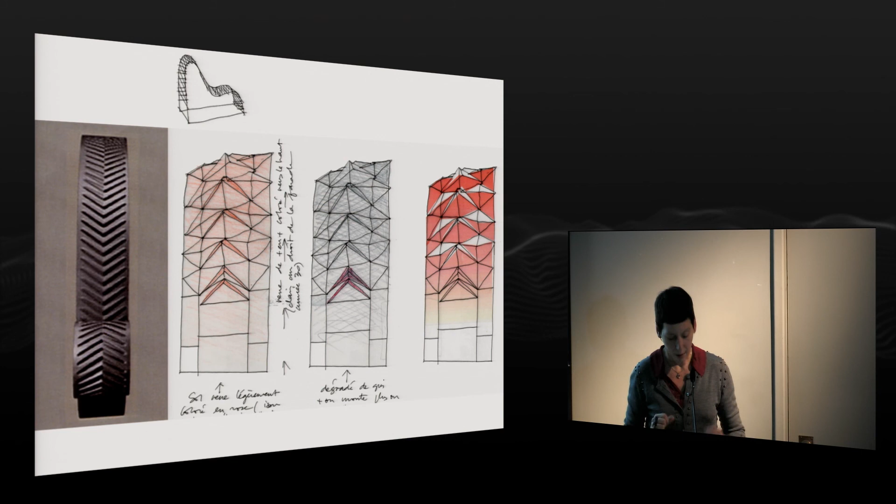The idea is to create a volume which can express all the infinity of spirits of the brand, which can really tell about the logo of the brand. So the idea is to fold a sort of envelope, like a folded glass which tells only about the logo of this car brand. You can see the envelope here, it's really like a showcase, only transparent. Even if the building is high, something like 28 to 30 meters, I wanted it to be only transparent, really a huge vitrine.

In it you will see the second idea, which is that the container expresses the brand, and the content expresses the car. Because the site is very small, only about 300 square meters, I was not allowed to build a lot of square meters in it, so I wanted to create a lot of breathing spaces. There are only something like 1,000 square meters at the end, but it's divided into a huge volume.

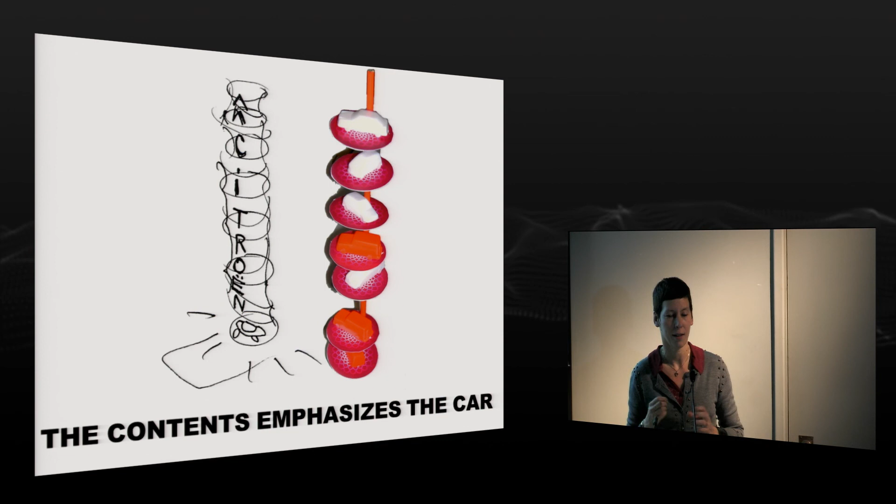In the center of this volume is a sort of sculpture, which you can see here. It's a sort of tree of cars, really in the middle of the building. It doesn't allow a lot of place for the public, who has to go around this huge sculpture of cars. But I wanted really to emphasize the cars and make it so the public goes around. He doesn't have too much space, but he's only looking at the cars everywhere, concentrated on this central sculpture.

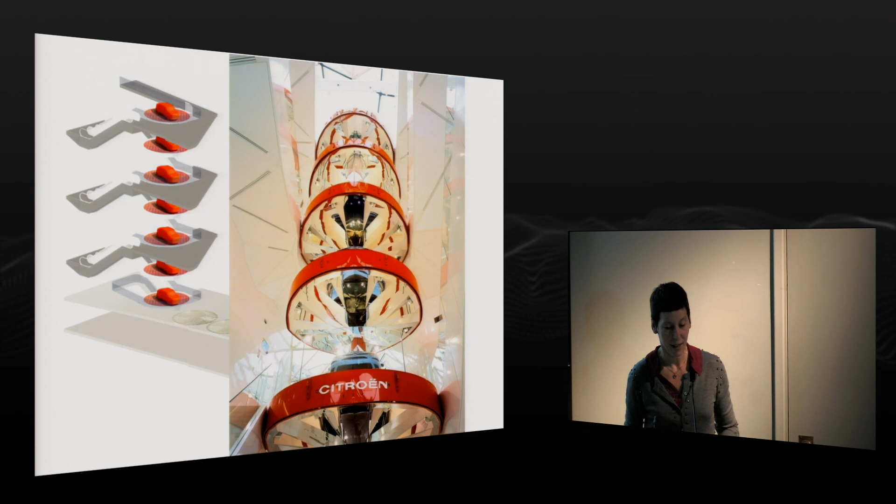Because the building is very vertical, the idea was to create this sculpture with 8 circular platforms. When you go up, instead of having only poor ceilings, the idea was to create mirrored ceilings to double the cars, so when you go up you see the reflection of the car, and when you go down you see the cars themselves. Around those two ideas, the project is very simple. It was very complex to build, but you have only those two ideas.

The container expresses the brand, and the content expresses the cars. You have a huge mast which is red. Everything around this tree of cars is red because it's the color of the brand, so you just have the mirrors and the sculpture, which is red. The basement is full of red too. It's a multimedia place dedicated to movies and to multimedia, I mean games, so you can have video games around the cars.

We have made a lot of models in the office, and the idea was really to sculpt the model, not in the way to invent a project like a car. The reason was more because the price on the Champs-Élysées is so expensive, I wanted to build the most centimeters I can inside the urban regulations.

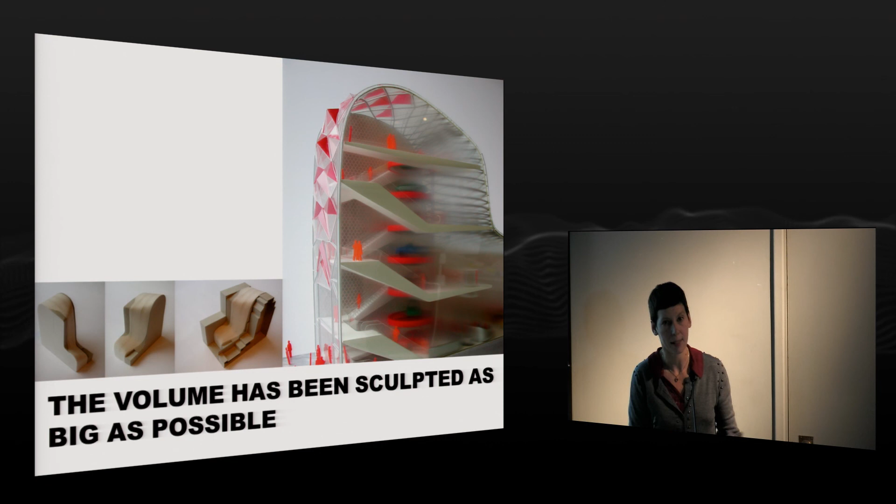We have tried really to be attached, to fit the best we can to the urban regulation, and it gives us this very curved volume, which is very high in the front on the Champs-Élysées and has a sort of smaller rear at the end of the site. On the right side, you can see a model that we made to see the way to dispatch all the passerelles, the stairs for the public around the sculpture of cars.

That was the first model that we made for the competition, and I think that even in the competition all my ideas were in this first model: the idea of a transparent curved volume, the idea of expressing the brand through the logo. The logo is a sort of shape like that, and all the facade is made with folds of glass which express this shape of the logo. There are red filters in the glass to express a little bit more the idea of the brand, which is white and red.

Here you can see the rear of the main facade. From the outside, we were not allowed to express the red filters in too bright a way, so in front of the red filters we put translucent filters to get a very pale red, a sort of very pale pink. But from the inside you can really see the red, and it's very warm because it creates a lot of reflections inside the building.

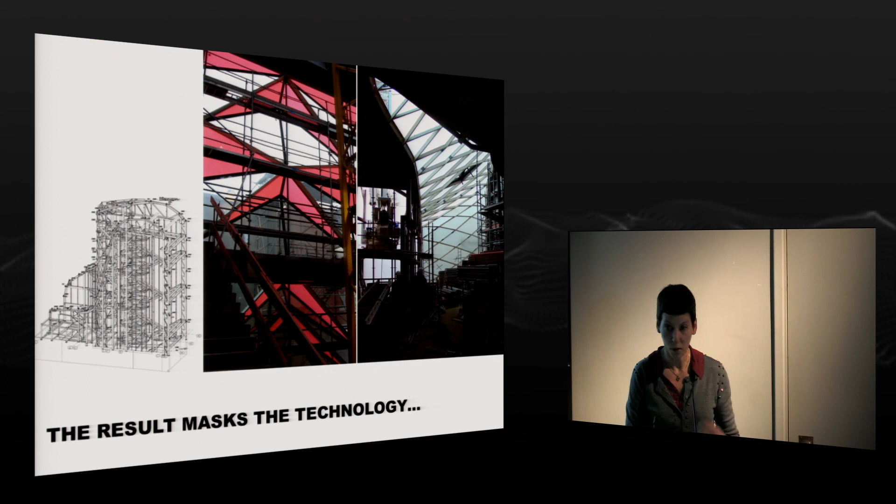So the idea for us was to create a very technological building, but after that to mask everything in a very pearly white atmosphere. The phase under construction is very dark, full of steel, but at the end you see nothing. You see just very bright white and red colors and very smooth details, and you don't see any steel anymore.

That is another building that we are trying to do in Montpellier, in the south of France. We try, because it's very difficult at the moment to obtain the permit.

I convinced the client, who is a French developer, to create a very mixed-use program, which was not the case during the competition. The competition asked us to create a building with hotel and restaurant, and we decided to mix those two programs with offices and also with housing. We were very happy to do a project which is really a deep mixed-use building.

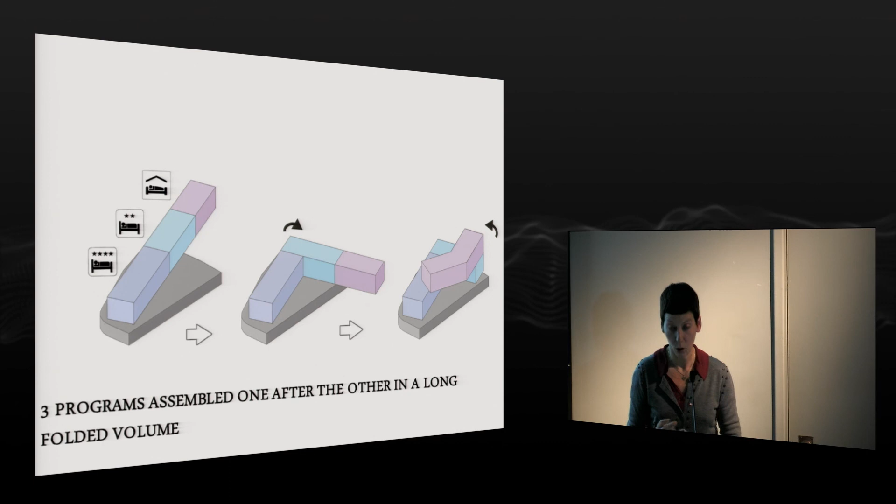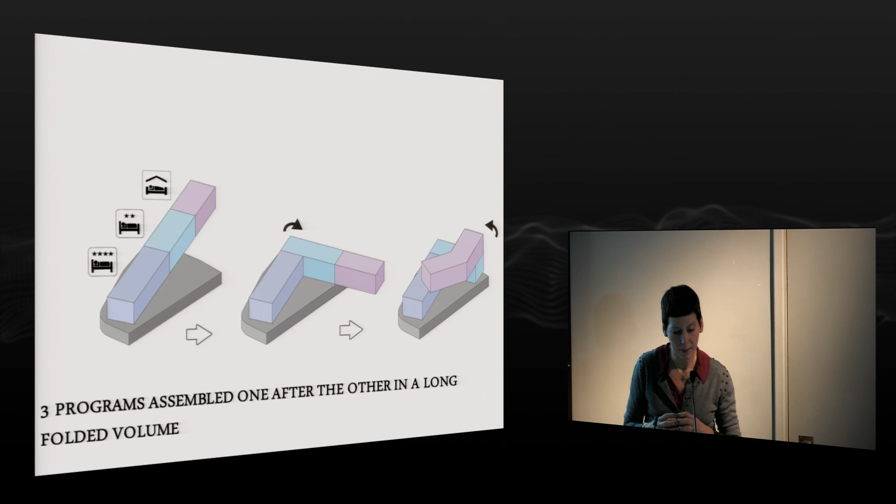We decided to create a sort of podium, here, with all the entrances of the different programs and with the offices. On this podium we decided to create a sort of unique volume which is very regular. The first part contains the first hotel, the second part contains the second hotel, because there are two, and the third part contains the housing, which was not anticipated by the town, but at the end they were very happy to see that this mixity was successful for the architecture.

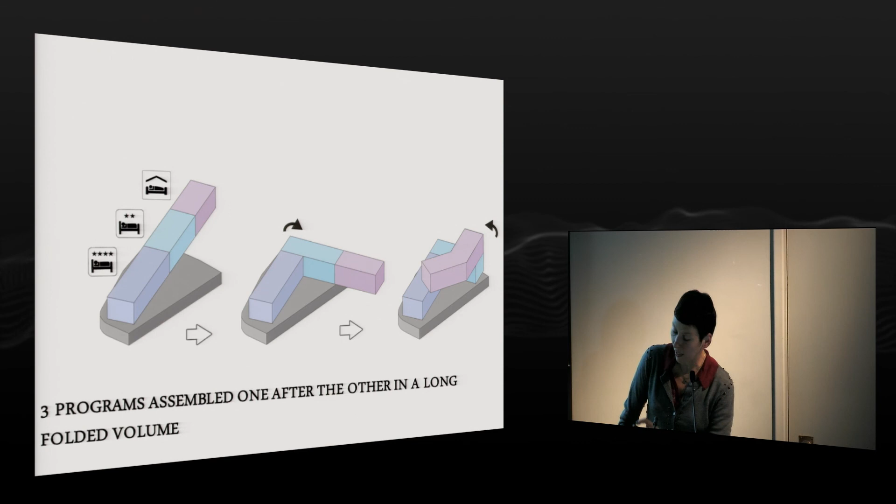We decided to fold this very long volume to respect the triangular shape of the site, and you will see it more in a good condition here. That is a model that we have made. You can see the railway station, which is here.

The first two volumes are very low, 6 levels, something like that, but they are perfectly integrated with the north part of the town, with the old city. And when the volumes move up, to create the volume dedicated to the housing, we have 5 levels more, and the idea is really with this one to anticipate the future district of the town. The idea was to create very beautiful housing.

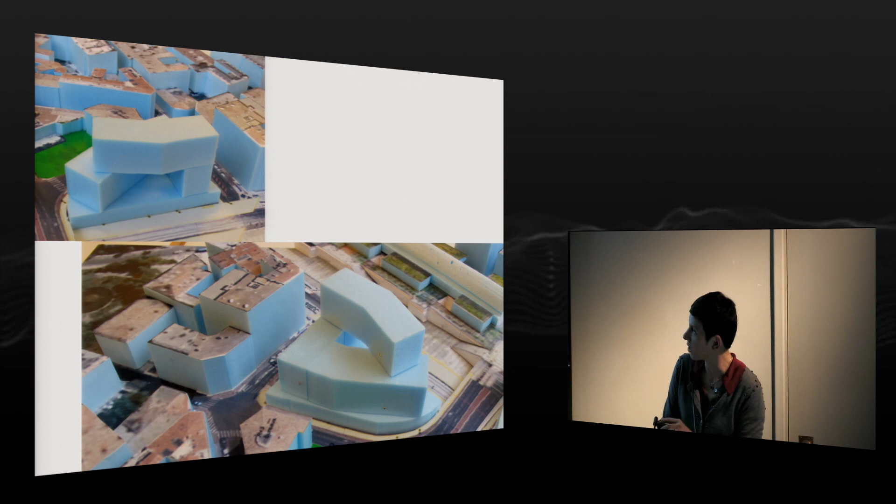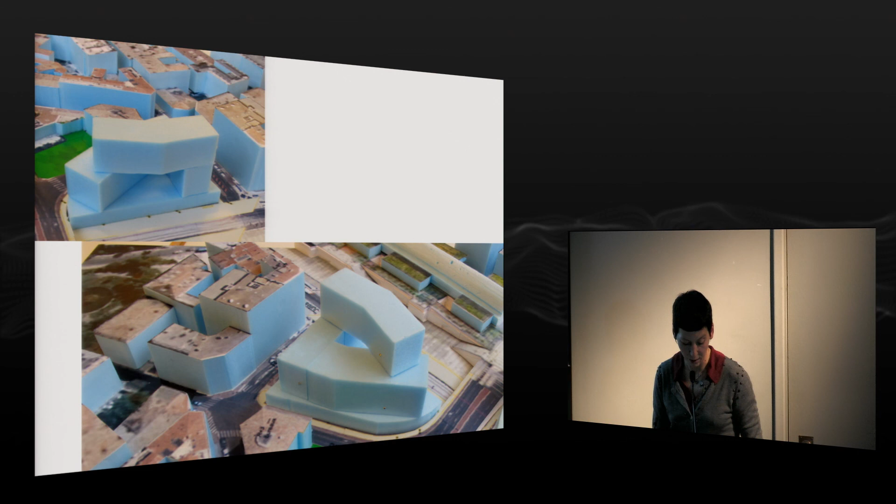In this part we have some big rooms for the hotel, which is going up, and this part is dedicated to the housing. It's like a bridge, so most of the apartments have 2 views, one of the north of the old city, one of the south on the new part of the city. That is the first 3D models that we have made.

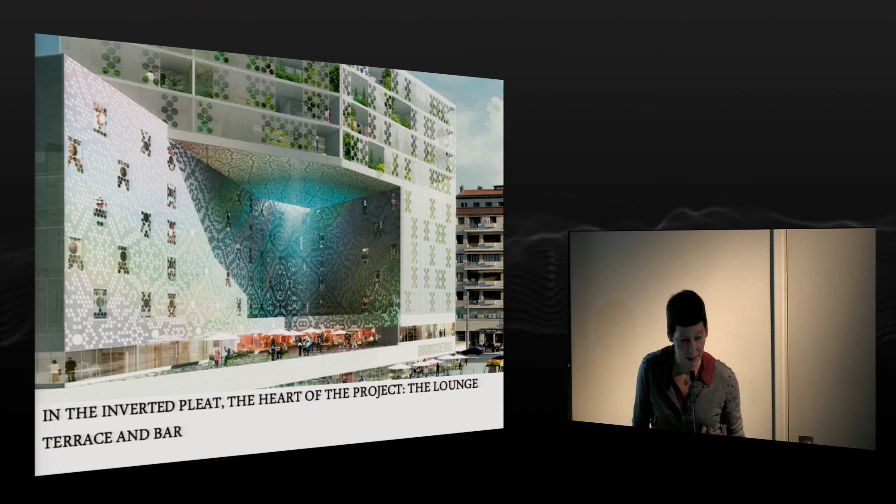That is some pictures. We decided to create an envelope which is really progressively more and more delicate, perforated. For the hotel, we are not so perforated, but when we go up to accompany the housing, the apartments which have a lot of balconies, we have more and more transparency. We have sliding panels. We are working a lot with natural ventilation because we are in the south of France and it's very hot during the summer.

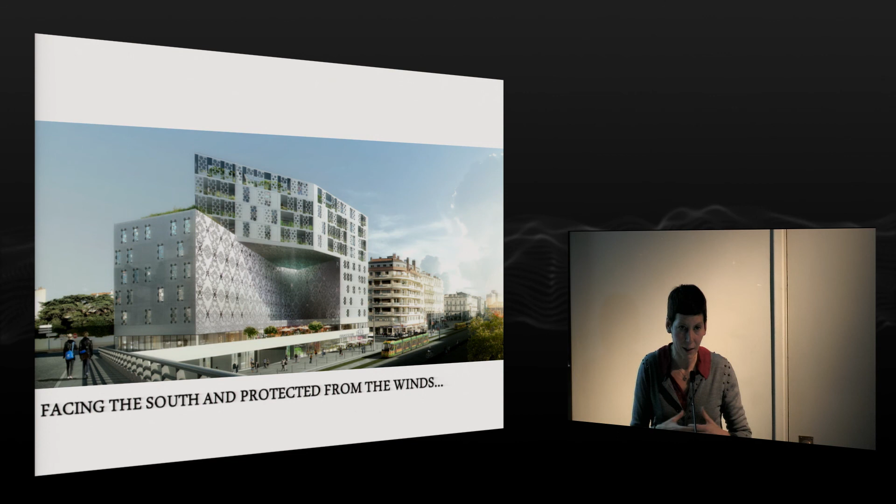One of the main points of the project was the idea to encourage a sort of common place for all the types of programs. It's this volume which is creating a sort of monumental media lounge. In fact, it's a sort of bar, mainly for the hotel, but also a bar, a cafe, a media lounge open for everybody outside and also for the housings, connecting the meeting rooms on this floor for the offices. The idea is to give this building and all its inhabitants a common place that they can really enjoy.

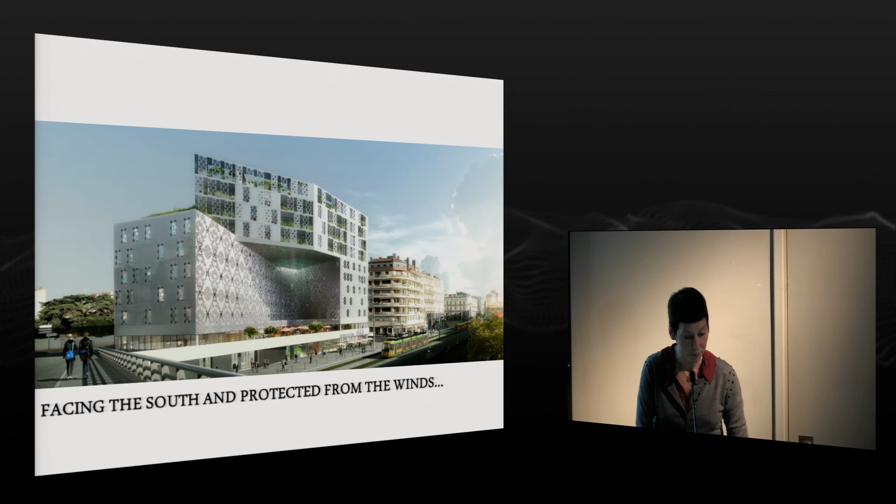This volume is facing the south. It's protected from the winds, and it's a sort of scenography, a sort of theater, looking on the south of the city. You can see some more pictures.

The facades are made with metallic panels which are perforated. The color is white. Only in this media lounge, which is this huge window on the town, we have the idea of putting a sort of holographic varnish to reinforce the reflections, to create some colors connected to the shadows and the sun. Also during the night, there are some very beautiful effects connected to this holographic varnish.

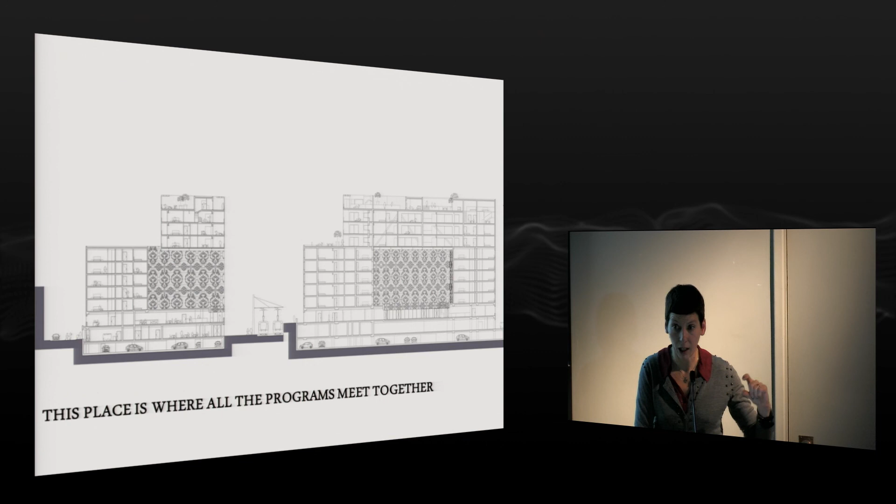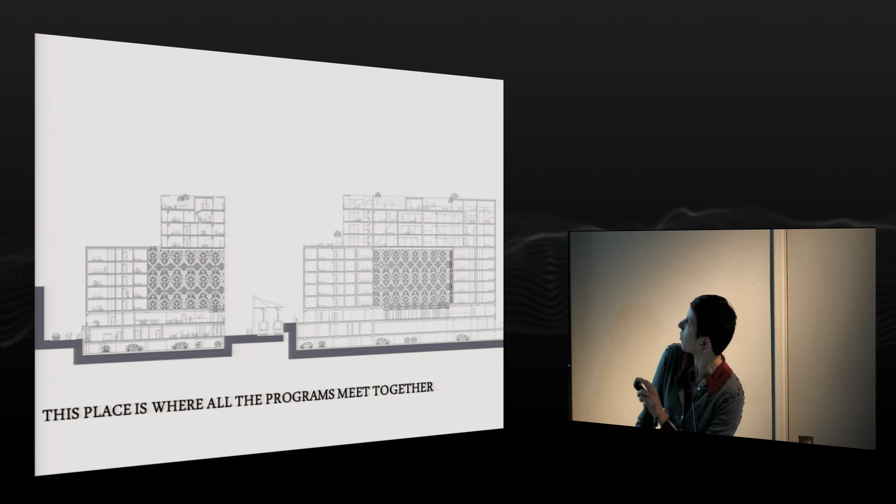That's the drawings for the hotel and for the housings, and some sections expressing the bridge. We have a huge Vierendeel beam, something like 28 meters, and it's not so difficult because the bridge is really connected to the two parts of the small volume.

That's the last project I'd like to explain to you connected to commercial activities. I have after that some other projects. That's a competition—we don't have a winner for the moment. The client is a very big French commercial developer whose name is Auchan.

The idea of the client is very difficult because he wants to create a huge place dedicated to commercial activities, cultural equipment, and leisure. It's something like 600,000 square meters. And he wants it very connected to the airport.

He wants to create a place full of different atmospheres connected to Europe—the idea is to tell a little bit more about Europe. For example, when people come from America or Asia, the idea is for them to go to this place to get the first feelings about Europe—the north, the south, the east of Europe, Britain, France, Spain—going through several universes connected to the different climates and cultures, and after that, of course, to visit directly London, Madrid, and so on.

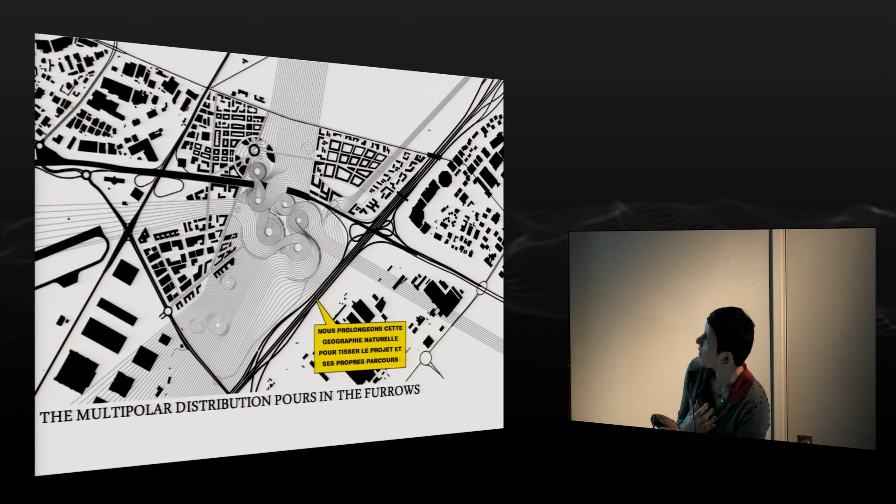So we accompany the public, because this part, it's still a park. So we accompany the public who will have the possibility to go up on the roof of the project. And it's like in a mountain. It will take promenades in a sort of park, and they will have the possibility to go down in the shopping mall, in the different places dedicated to commercial, leisure, and so on.

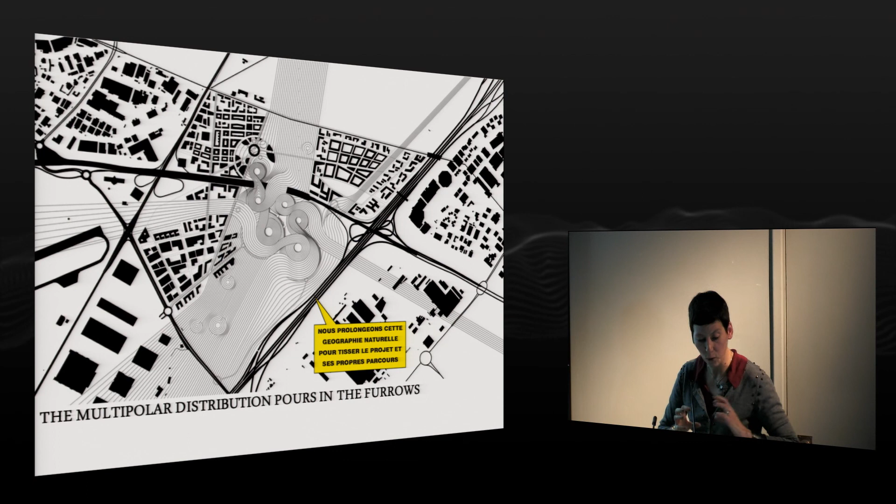But the integration of the project, it's very deep. I was really impressed by the context and the curls that we have made. It's really the idea of working with the furrows and to turn them into this project. You can see a little bit better. The green is the color really because that is a natural park, and that is the park which is on the roof of the project.

Here you can begin to see the work that we have made on the lines. It's like the furrows that we have reinterpreted into the project. And you have different colors of park. For example, that is lavenders because we are on the roof of the Mediterranean atmosphere. That is the North atmosphere, the France, the East Europa atmosphere, and the Britain atmosphere.

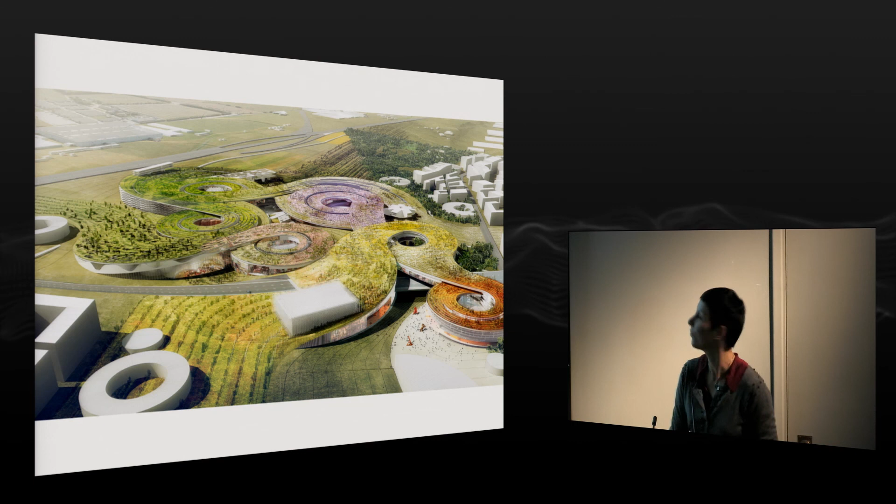So on each part of the roof, we are working with specific landscapes which really tell deeply about the geography, the climate, and the spirit of this part of Europa. That is a roof view. The site is beautiful because when you will be on the roof, you will have the possibility to see Paris. The Eiffel Tower is somewhere here.

And you have, no, it's not little, it's big programs which are emerging on the roof. It's the cultural equipment, because we wanted for them to be upon the project and underneath the project. We wanted for them really to create a sort of continuity between underneath the roof and upon the roof. That is the idea of the balcony with the Tour Eiffel that you can see here, and the different atmospheres that we would like to invent.

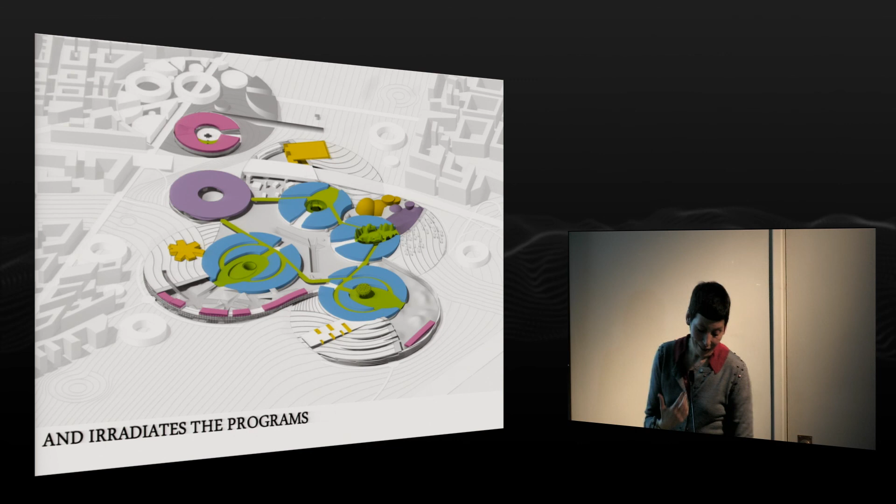That is the flows which are underneath the roof, which have the possibility to connect each universe of the Europa. You have squares which are in a small scale to speak about the urban European scale. You have a lot of 3D sketches and programmatic sketches to express the way to organize the program.

And the way that we have emphasized all the cultural equipments. They are like little points, but the idea for them was to create a sort of disobedience. I mean, they interrupt the flow of the leisure or of the commercial activities to create contrast and to make it so that everybody can enter into them without knowing before. We want to make it so that the public has the possibility to go easily inside, between two shops, for example. That is some other pictures.

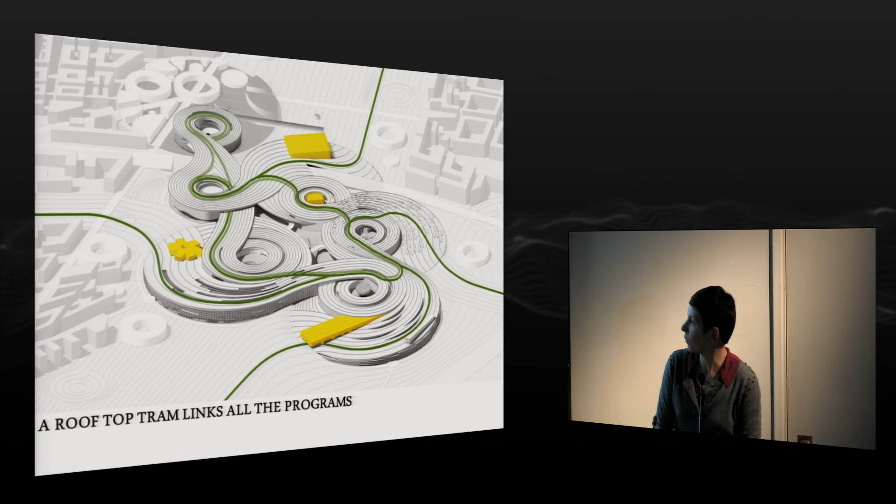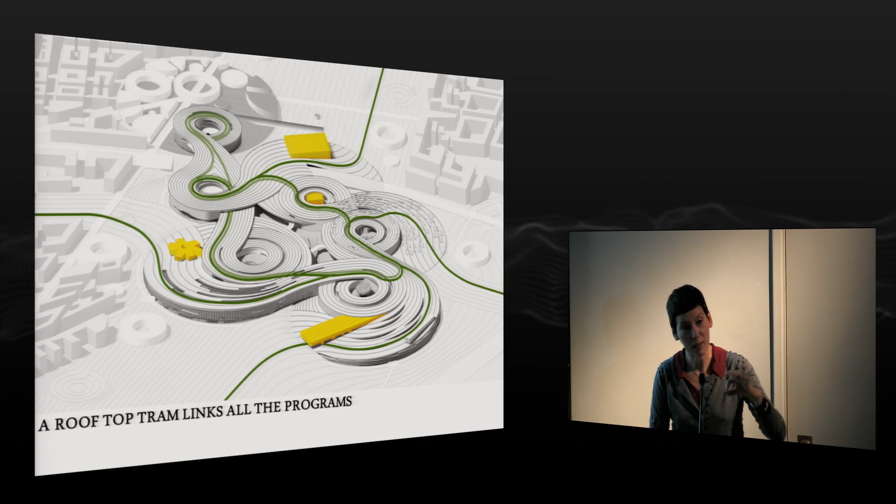The way for the cultural equipment to go through the roof and to also create a lot of entrances on the top of the park. And the green line is a sort of train that we wanted to link. So it's a sort of rooftop tram, like in the mountain where you have a sort of promenade that you can take on the top of the mountain. It's the same idea.

Around the sustainability, because the project is so huge, we wanted to create external projects to help our project, but also to help the district. And the idea was to create a sort of project which is like a sort of open source project. And it can become also the logo, the brand of the project.

About the cultural equipments, you can see the first one that I have built a few years ago. It's the refurbishment and the extended part of the Lille Modern Art Museum in the north of France. You have an existing building which is black and the extended part which is red colored. The existing building was built by Roland Simounet and was listed around 2000, something like that. So it's one of his last constructions, and it was quite immediately listed.

So during the competition, we really had to work with the monumental authorities, and the idea for them was to create an extended part which was really separated. We had to keep a distance between the old building and the new one. Perhaps for you it's very difficult to understand that, but in France, when we have a listed building, it's very difficult to allow contemporary architecture. The monumental authorities are always afraid of contemporary architecture.

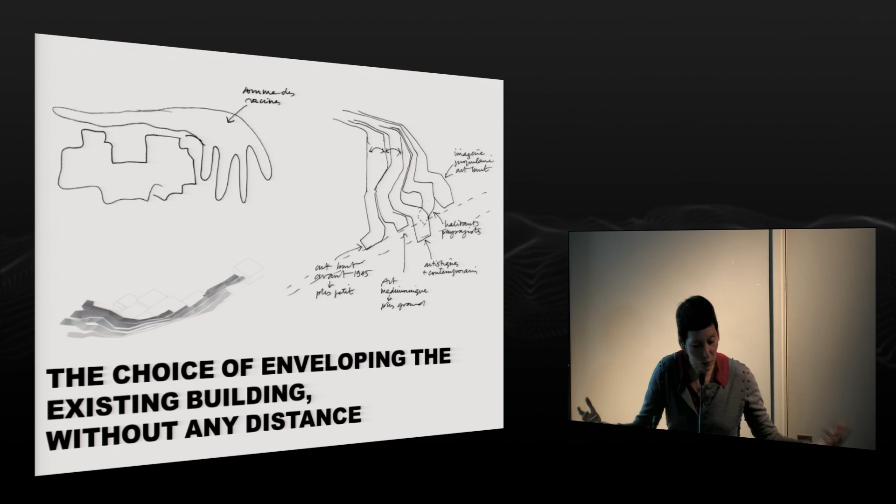It was also a way to respect the park, which is beautiful, surrounding the existing building. So the less I take place, the more I respect the park, and I let a lot of breathing spaces around the global museum, and I let also a big place for the park to develop itself. I have organized the extended part like two arms, which are telling Roland Simounet that I love the existing building, and I wanted to be very close to this existing architecture.

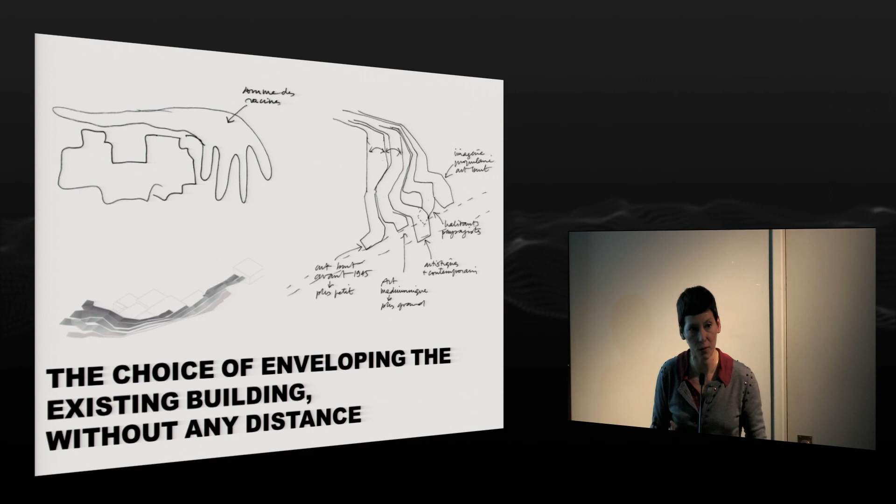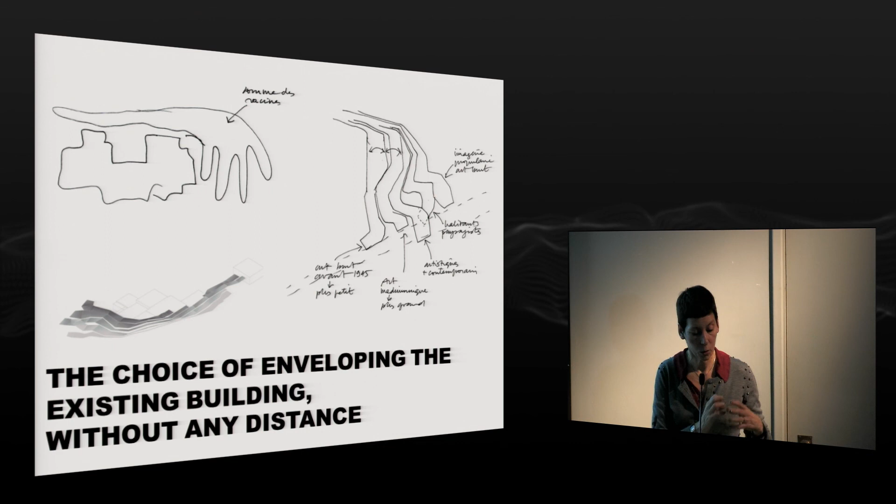I wanted also to create a lot of links between the administration, for the collections, for the flows. With this idea, I have created a sort of technical flow which is parallel to the public flow. So in terms of functionalities, it was much more efficient to do that. But also in terms of architecture, I insist on that. It was very important to link the old building with the new one, to link the old collections with the outsider art collection. And at the end, I won the competition.

That is a model that I have made to express the fact that even if I like the existing architecture, I wanted to be independent and to have my own vocabulary to envelop the outsider art. I didn't want to do the same architecture as Roland Simounet. This is a drawing that I like because it expresses the fact that on the extended part I have made something which is quite different in terms of volumetry. The rooms are not rectangular, they are very long and folded, but the scale is the same.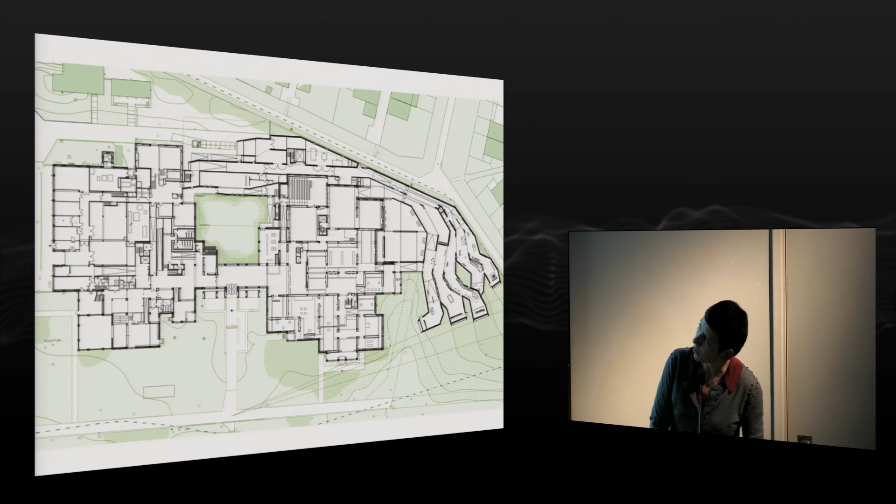I've always tried to have my own vocabulary, to have my own feeling connected to the outsider art, but at the same time I wanted to keep the same scale and to respect with the scale the architecture of Roland Simounet. It's a very flat project like his architecture. He has made his architecture like a sort of villa, and I have made the same. It's a sort of villa, but in a more organic way to arrange, to accompany, to envelop the collection.

So now the result is that I had the possibility to create a sort of continuous promenade, for example, between Dubuffet and Annette Messager, who is a very great artist of contemporary art. When people are moving in the museum, they are quite not noticing when they are passing through contemporary art and arriving into outsider art. That is the way to organize the five very long volumes. The phase under construction.

It's a building that I have made with concrete, but the roofs are very light. It's a steel structure. At the end, you cannot notice it because it's really like five fingers, five roots, which are emerging from the landscape.

And because the outsider art is very fragile, we had to create places and rooms which are quite a little bit dark, because the light is very dangerous for the art. So you just have little perforations, and it was a sort of way also to create a link with the architecture of Roland Simounet, because he has worked a lot in North Africa. And my way to create the perforations was inspired by the moucharabieh, which are very often in North Africa. So I wanted to tell Roland Simounet that I had, in a way, the same roots, the same inspirations.

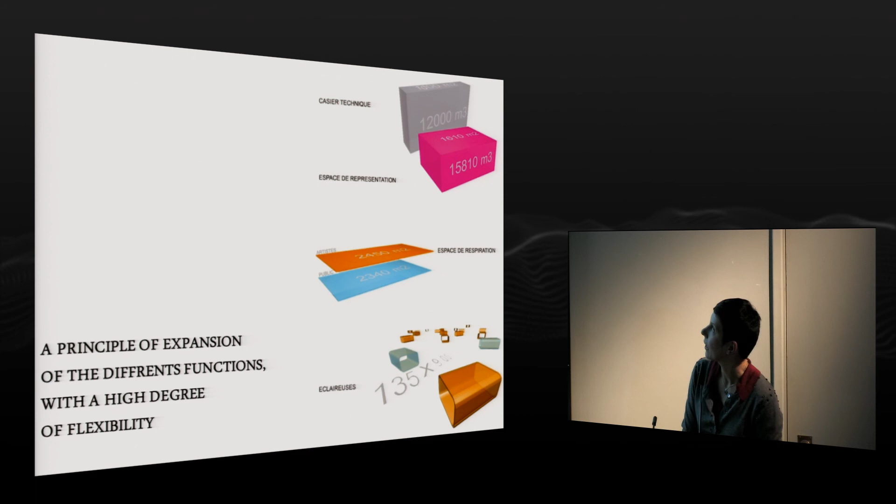That was the challenge. We wanted really to create a sort of mix between the visual arts and the music, and to create also a mixity between the public and the artists. So it's a sort of melting pot between artists, public, visual arts, and music. And I will go through in a quick way, because it's very difficult to explain in detail; I need a long time. But I wanted to create 2 types of places in the building. Places which really have to be formal, which have to be acoustically waterproof, which have to be insulated. We have 3 places like that, 2 concert halls and a sort of cinema.

And everything else, the rest of the building, I wanted it to be very flexible. And I've called all the other places breathing spaces. They are very flexible; they always have the same type of ceiling, same type of floor, and the idea was for them to change the program. So, for example, for 6 weeks, all the breathing spaces can be dedicated to artists because they have to prepare an exhibition. After that, it can be a resource center, it can be an exhibition place, it can be an extended part of the cafe. So the idea was to create around the 3 main concert places square meters which are totally flexible.

You can see the phase under construction and how much we were completely étouffés. Yes. In this Parisian site, with no possibility to have windows and no possibility to have ventilation. I mean, it's a very, very dark place.

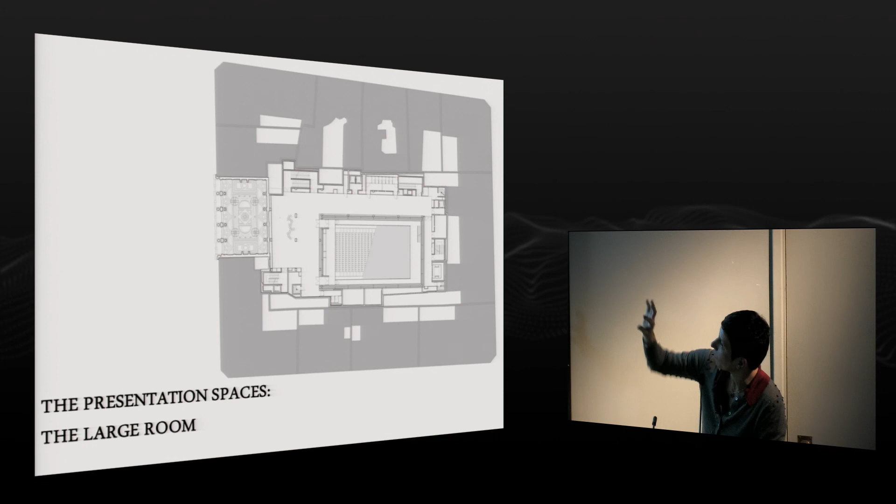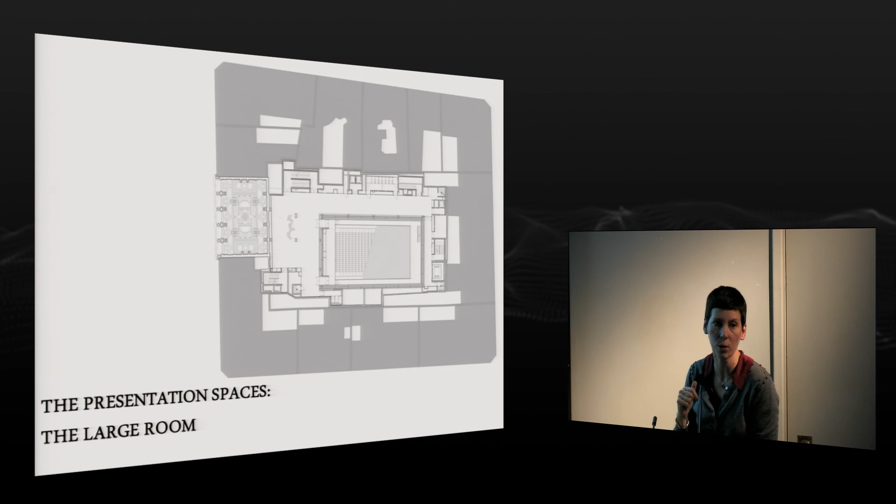That is a sort of main plan. You can see the main concert hall, which is here. And the acoustic idea of the project is like Russian dolls. So you have 4 or 5 very insulated envelopes, which are going smaller and smaller until this place, which is the main concert hall.

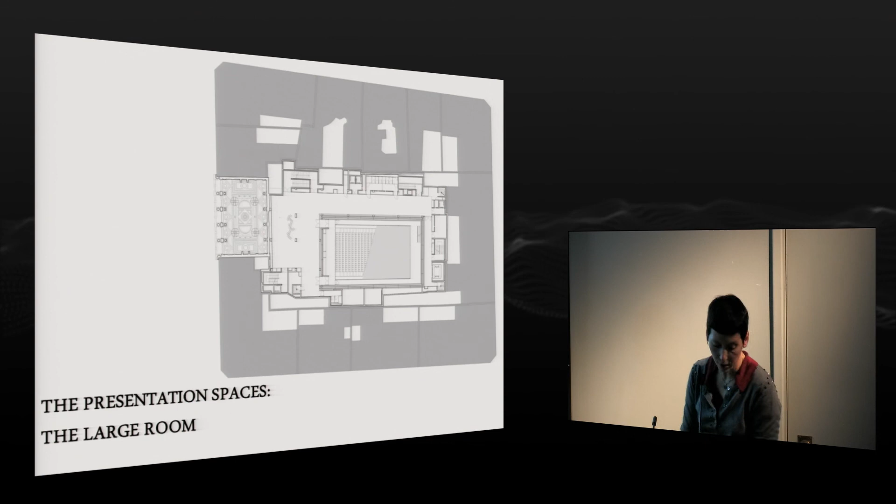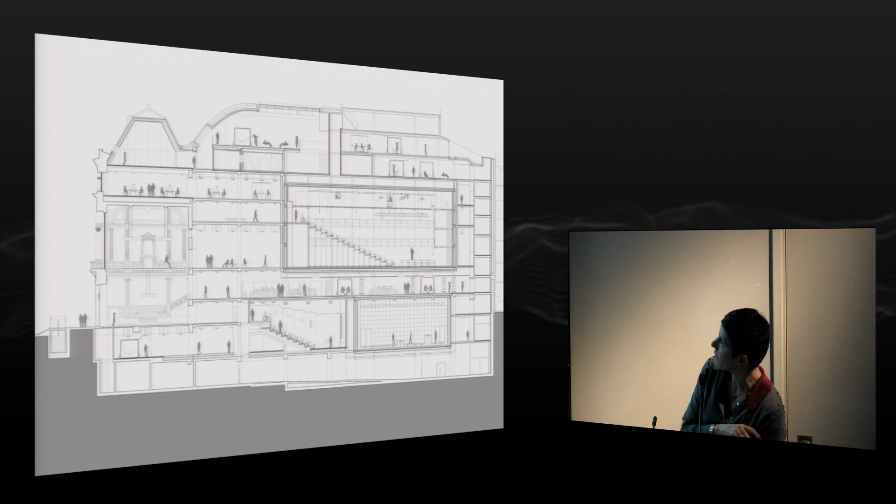That is a section. You can see the 3 main places, the first concert hall, the second one, and the little cinema. And everything else is very flat levels, like breathing spaces, which are totally flexible. That is a phase under construction for the concert halls. We have a lot of flexibility inside. The floors are moving up and down, the ceiling too, and the walls are also very flexible with a lot of mobile panels and so on.

That is the main concert hall. You have the possibility to have a stage which is here, but you can have many stages in the middle. You can have a stage on the opposite side of the concert hall. So the flexibility is also in this main place. You have also seats which are mobile. So on the left, you don't have any seat. It's like a wall, and you can stand up. And on the right, you have something like 380 seats to see concerts which are more calm.

That is a small theater, the small concert place, with the floor which is moving up and down, and you have different scenography. It's a place where the sound is very, very deep. So when you experience this place, it's really full of impressions. That is the sort of cinema.

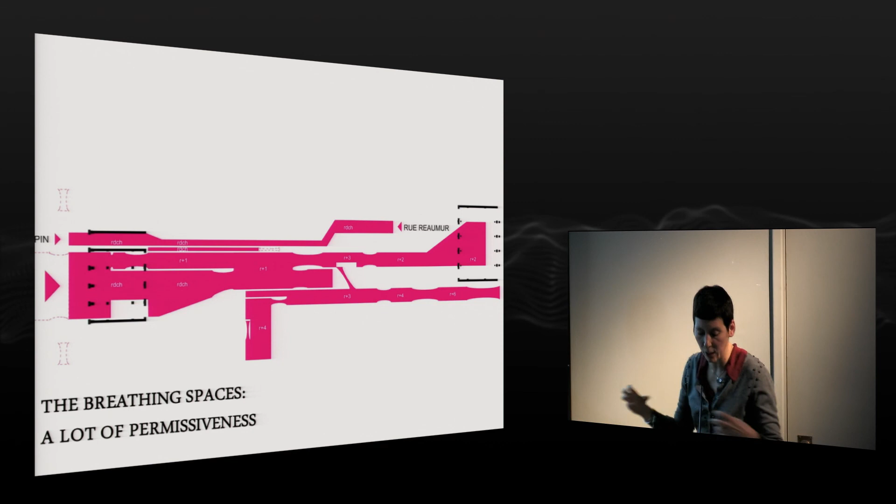And that is the development of the breathing spaces, which are folded in the building from the basement to the top. That is one of them, which is surrounding the main concert hall, and they are always doing installations. That's dancers from an English art team, which is called We Could Never Be a Dancer. That is an art installation, also made by English artists. That is in the basement, close to the little concert hall.

That is another breathing space, which is here colored in yellow, because it's also a work made by an artist. And that is a furniture that we have made, which is called éclaireuse. The idea for this furniture is to move. They are moving everywhere in the building. Some of them are shelving. Some of them are places to work. The shelves are here, the places to work are here.

When they are pink, it's dedicated to multimedia, so you can sit or be in several positions, and you can really be immersed in multimedia installations. And the idea was to really connect all the éclaireuses together and make it so that they can really move everywhere in the building to accompany the different programs when they themselves move. That is some of the éclaireuses, multimedia éclaireuses.

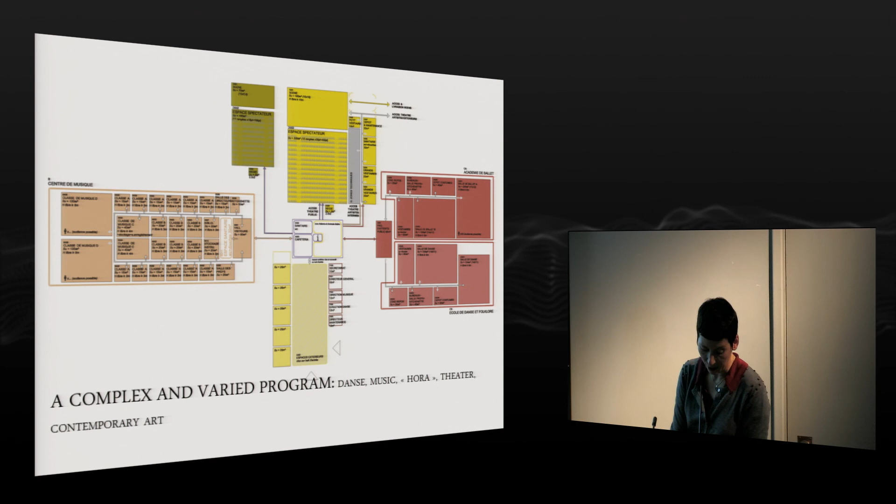The surroundings are, I mean, it's not like in France. So it's very heteroclite. You have very big buildings with 15 floors of housings. You have a very awful building which is here dedicated to sport. So the architecture is not so beautiful. The program is here, so the 4, now 5 parts dedicated to all those forms of arts.

And so the idea was to create this vertical building connected to the narrowness of the site, but also connected to something else, which is that in Israel, in the public equipment, you have to create shelter rooms to be protected from rockets. And you have to have those types of rooms in a very simple place on each level, so that people, if there is a fire or a rocket, have to be in less than 4 minutes in these shelter rooms.

So the idea was to create a sort of very strong central tower in the middle, which is not so big. It's something like 17 meters by 17 meters. And in this small tower, you have all the vertical circulations and all the shelter rooms. And at the end, this constraint was very helpful for the project, because we decided to create in this tower a sort of generous place where everybody meets, where there is also the possibility to create installations, to do exhibitions. It will be a very beautiful volume.

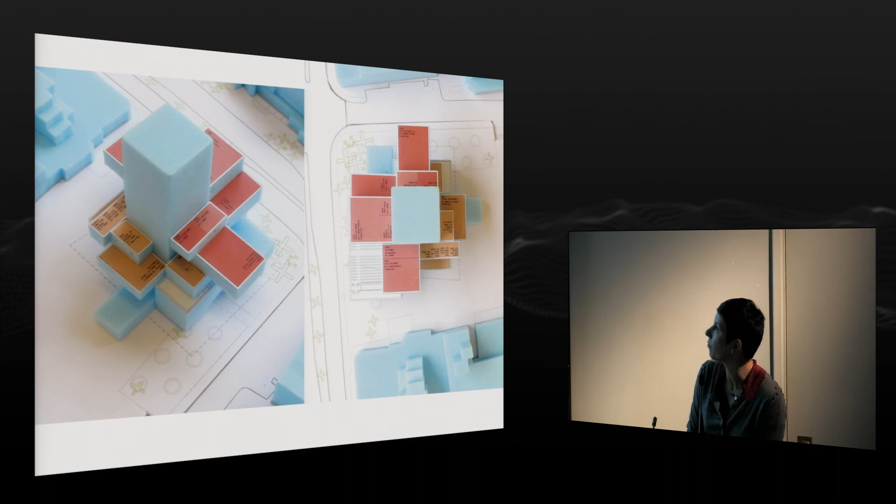But you can remark that almost each of them has a different height, different size, to respect in a perfect way all the constraints of the program. We have made several models one more time, and the idea was to benefit from those volumes to create a lot of outside terraces, so that the users can work inside, but they can also work outside. They can have the possibility to rest outside.

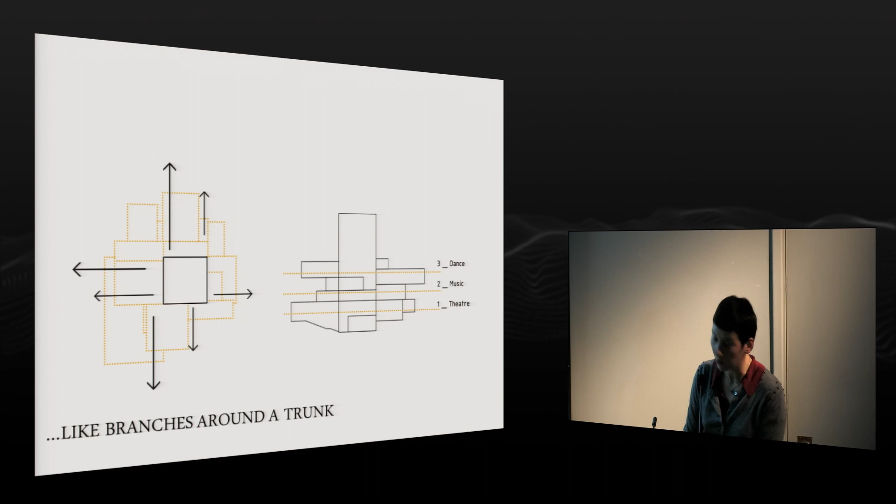The views are, of course, beautiful. You have a lot of sun. So it's very helpful also to have more square meters to work outside on the terraces, which are protected from too much sun. That is one of the models. We also had the idea of enveloping the building with a sort of skin made with metallic panels. You will see that after.

So the idea of the shadows of a lot of terraces which are really open to the public and to the users. And of course, because the volumes are really surrounding the tower, you have terraces everywhere, and you can get very beautiful views on the town of Ashkelon, on each orientation, the north, the south, and so on.

Some of the terraces are full of shadows, which is a good idea because it's so hot in warm moments. That is an example of terraces where you can have seats, a sort of theater, and it's given to the users in a very generous way to help them have more place to work and experiment.

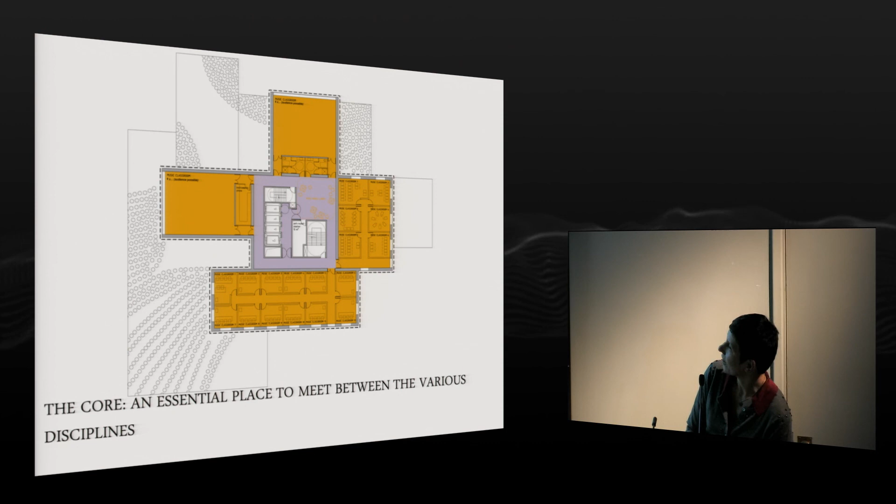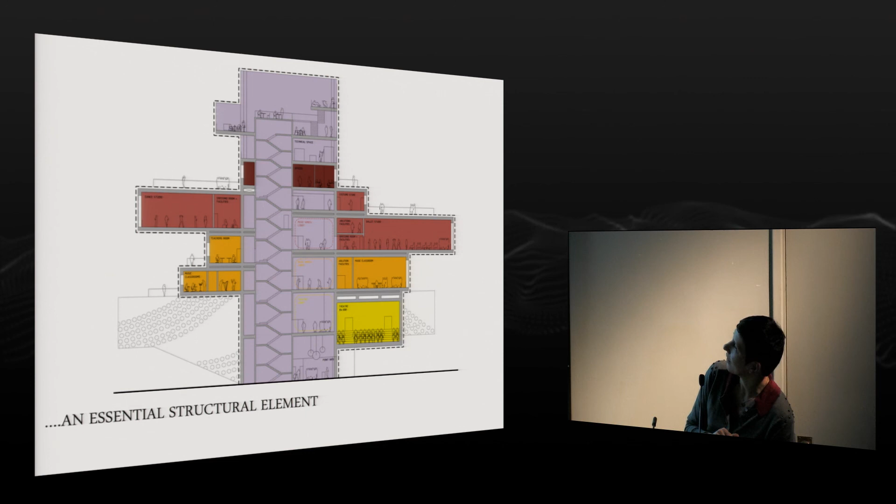That is one of the floors, the terraces which are open to them always. That is a section, so you can see how many levels there are, and the way to put life in this tower. That is a model we have made. The circulation is always different from each level to another, so people can see together, and they can use this place to create video installations, movings. Really to have this place like an art place.

And of course you have stairs which are protected, but you have also stairs in the middle of the atrium.

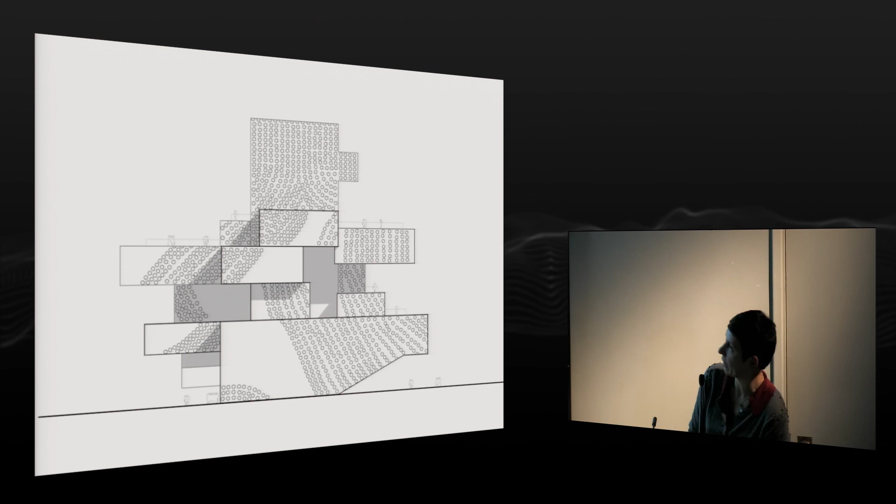That is the idea of the metallic panels, which are creating a sort of continuity. You have a lot of perforation because you have a lot of windows behind.

I will just show one project. That is the building I have made in Saint-Étienne. You spoke about it a few minutes ago. It's an administrative building which is also close to the railway station. The idea for this building is also to begin a new district, where the mayor of Saint-Étienne wants to demolish a lot of buildings and create new contemporary architecture, mainly offices.

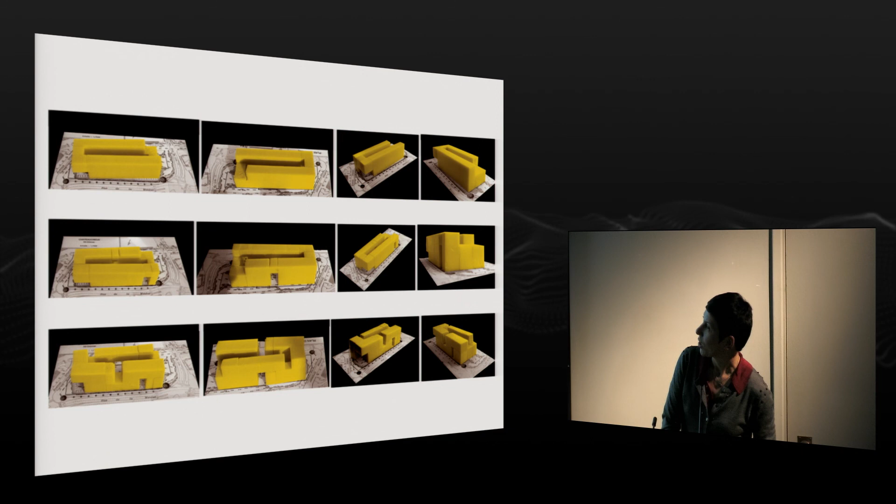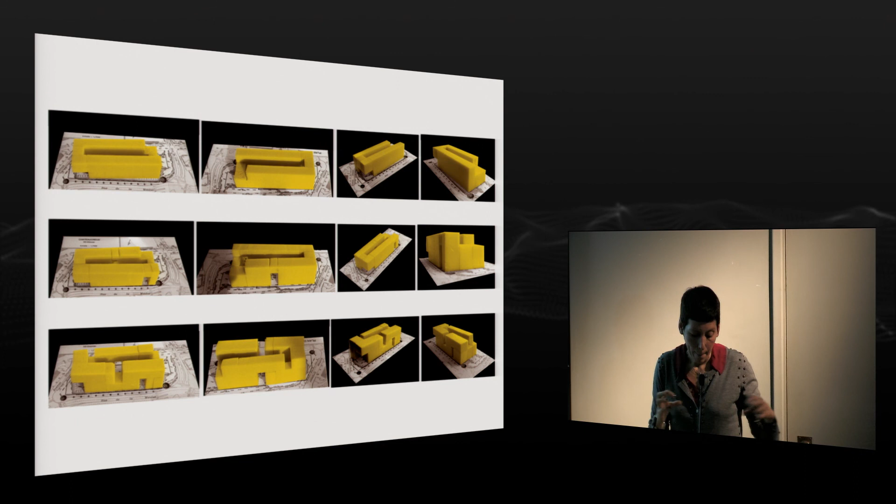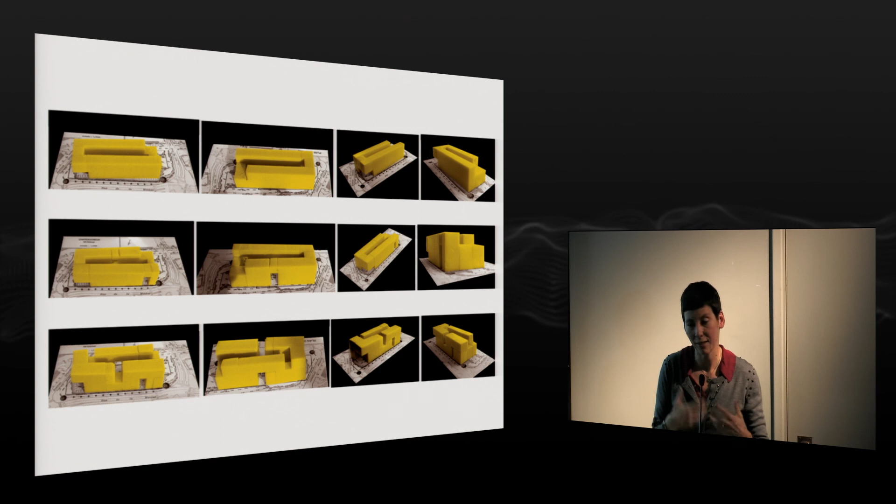So we tested a lot of models, but you can see each time, particularly at the end, the way we have, once more, created a sort of regular volume, and folded it for two reasons. The first, to keep the continuity of the volumetry, to allow the users to fix their desired square meters, not during the competition, but after. And we had to absolutely keep a lot of flexibility, so we had to keep the idea of a continuous volumetry.

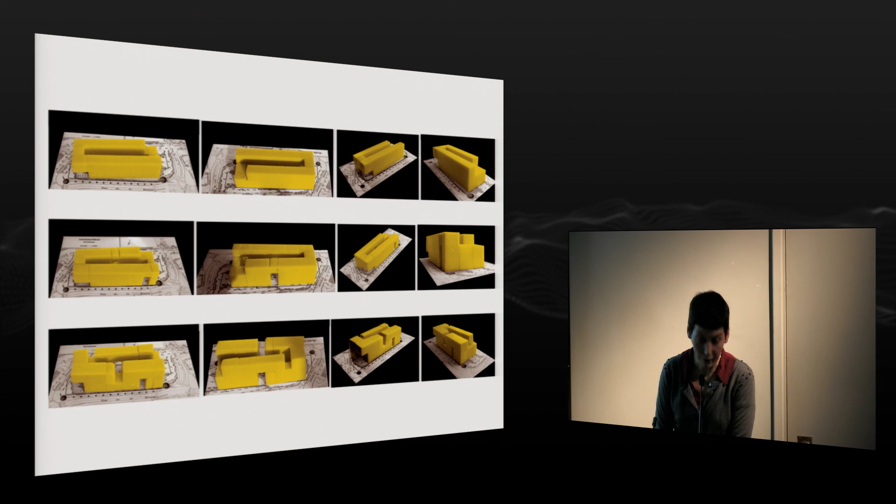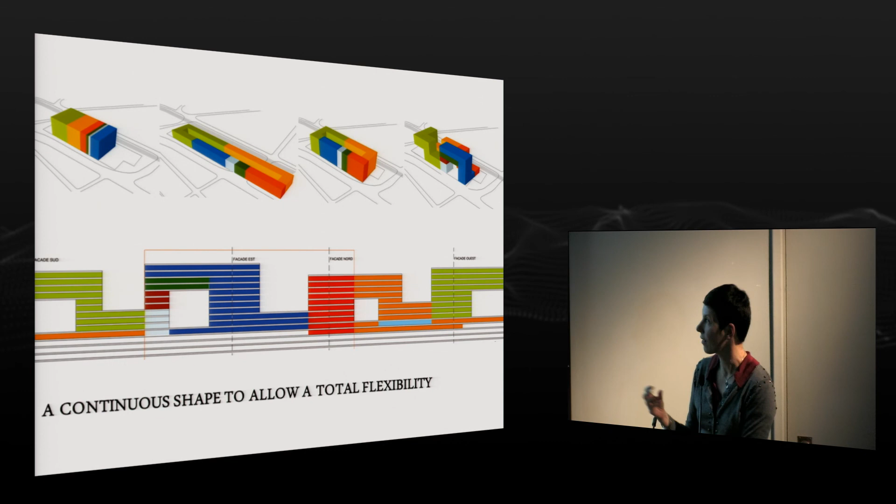And the second reason was to create a lot of doors, to create transparencies, which you will see in more detail. So the final volumetry was this one, and it allows people to increase or decrease their number of square meters. They only have to get the approval of the neighbor, but because it's administration, they are always okay to do that. So the building still keeps a lot of flexibility now.

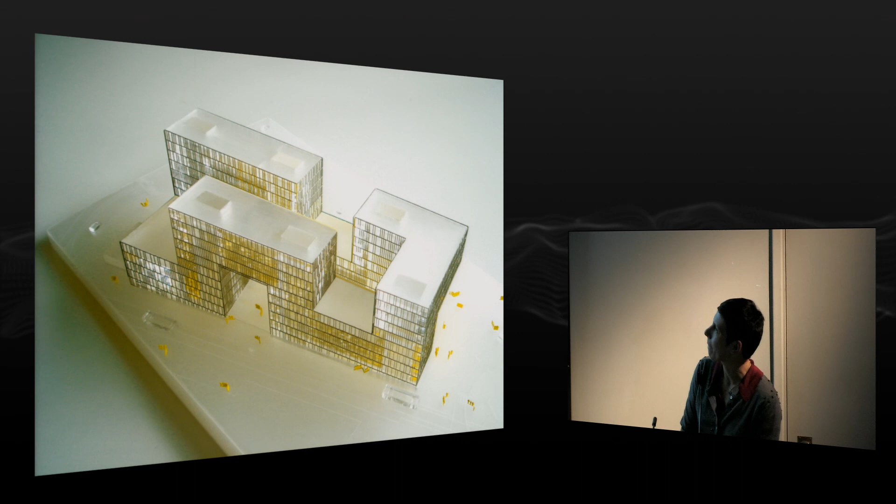That is a way to fold the building. You can do a model yourself. That is one of the first models.

In fact, you have two rows of building, two parallel volumes. When the first one is going up, the second one is going down, so you can have inside the offices a lot of views. You don't have so much space where you're really in front of another part of the building.

Here, when the first is going up, the second is going down, and the opposite is also here. You have three big doors: this one which is behind, and this one which is the main entrance to the courtyard, which is in the central part.

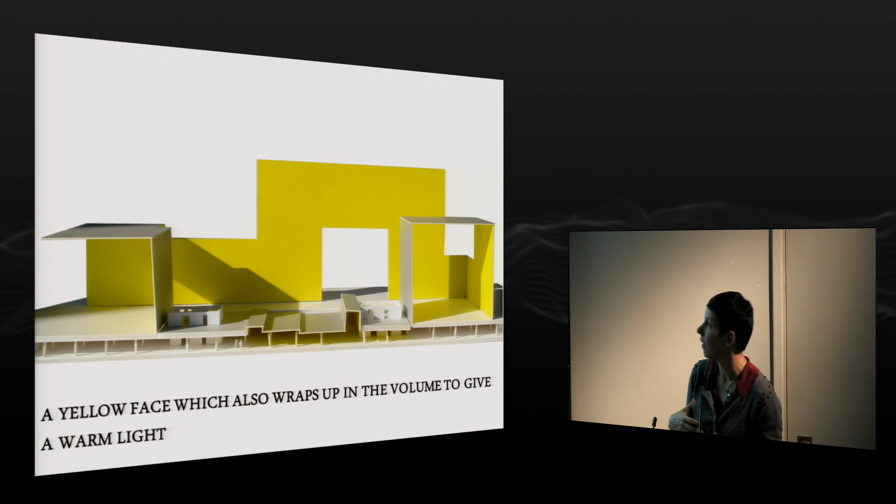The idea of folding the buildings is also inside the ground floor, inside some of the common facilities. That is the three doors. This facade is facing the south, and you have all the entrances connected to the courtyard, to the interior street.

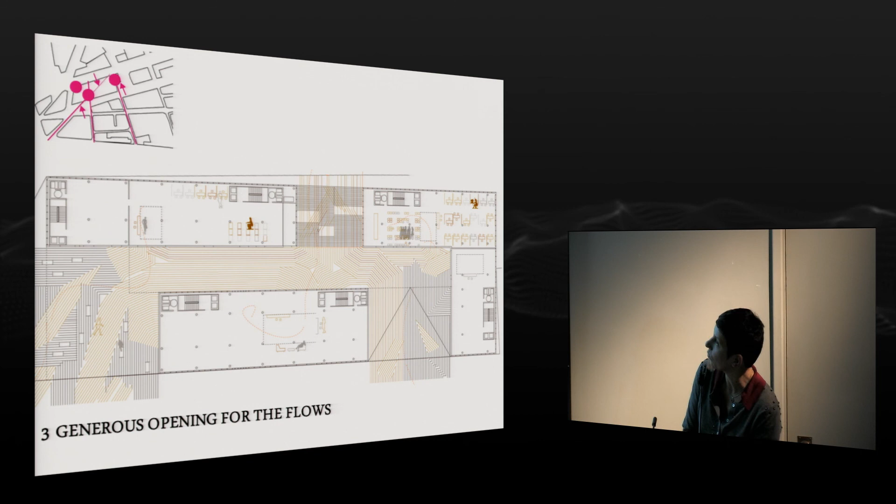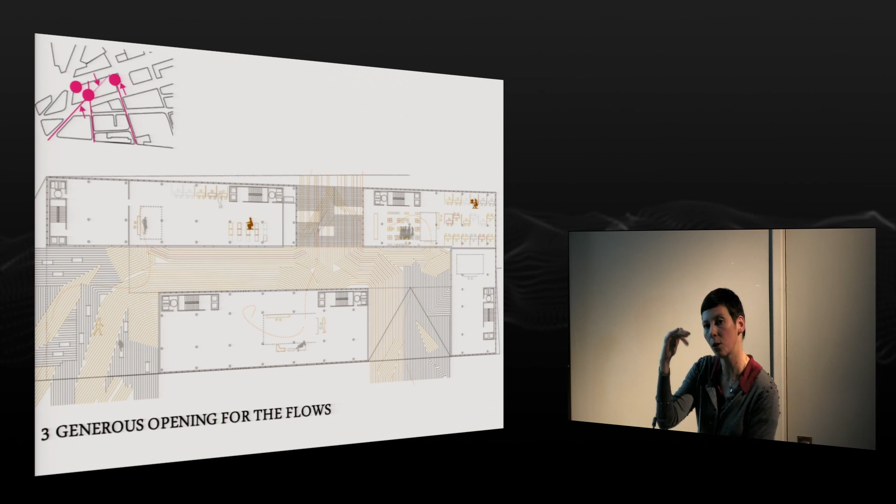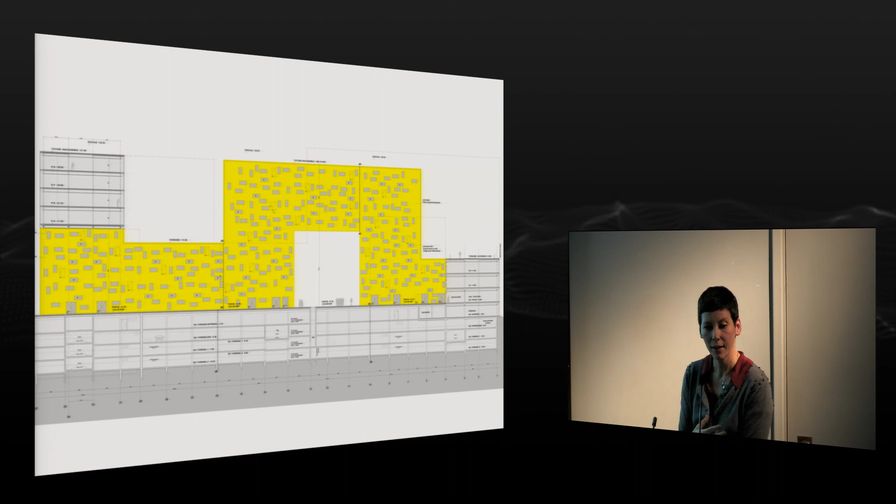There was an idea of using a very bright color. I have chosen yellow because the street you can see here is very narrow—only 8 meters—and the building goes up to 35 meters. So I wanted to create a sort of courtyard which is very playful, very bright, with a color like an artificial sun.

The idea of the yellow is to create a sort of front facade which is very playful. That is the volume, the building integrated into the context—you have very small buildings but also very high buildings, like this one. The main entrance, and the idea of the yellow, is to always stay behind the alignment, the outside alignment.

Once more, there were monumental authorities who don't want too bright colors on the outside facade. So my idea, like a joke, was to create the yellow only on the interior facades. He was not so happy.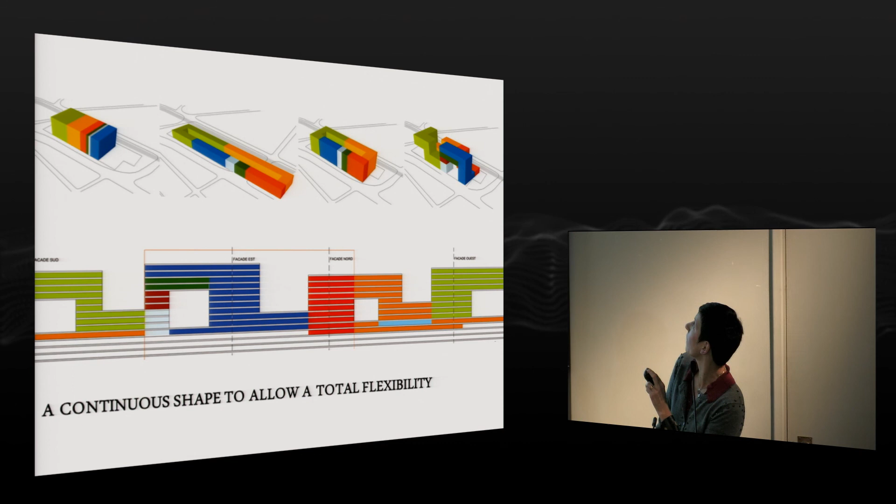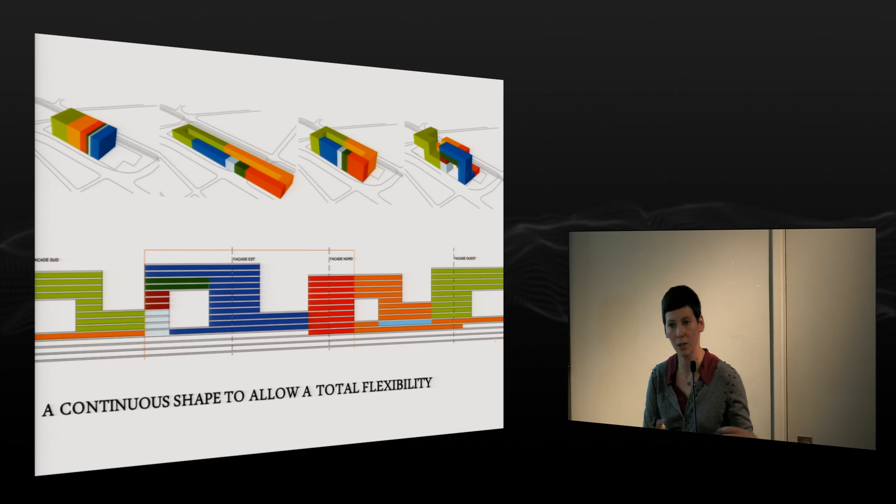Even now, for example, we have what I think is the biggest user, here. He decided a year ago to decrease his number of square meters, and we managed with the orange one, on the rear part of the building, to increase its square meters. So each time they discuss together to organize a way to partition between them, to create the partitions, to increase and to decrease.

Thank you, it was a beautiful lecture and some very beautiful work. I want to ask you about, I don't remember the name of the project, the European Expo project, the one close to the airport. Yes, Europa City.

You mentioned that it would be a controversial project, and I think your proposal has a certain radicality to it. So I want to ask how, as a project like that would go forward in your planning, you would avoid the kind of pitfalls you're trying to avoid by saying you wanted to capture the atmosphere of Europe without, for example, its iconography.

As a way of comparison, a number of years ago I saw a lecture by the historian and critic Stanislaus von Moos, the Swiss critic, who had written a very highly regarded book on Le Corbusier. He gave this very strange lecture where he presented a project in Switzerland called Swiss Miniature. Do you know the project? No.

There's a project, I think not near Zurich, but in Switzerland, which is a theme park. It's built, yes, it's been there since the 60s. It's a theme park where all the great landscapes and monuments of Switzerland are placed, and there's a monorail that takes you around to see them. I've been there, it's actually great. It's called Swiss Miniature, it's great. Yes, they have the Matterhorn and all sorts of things there.

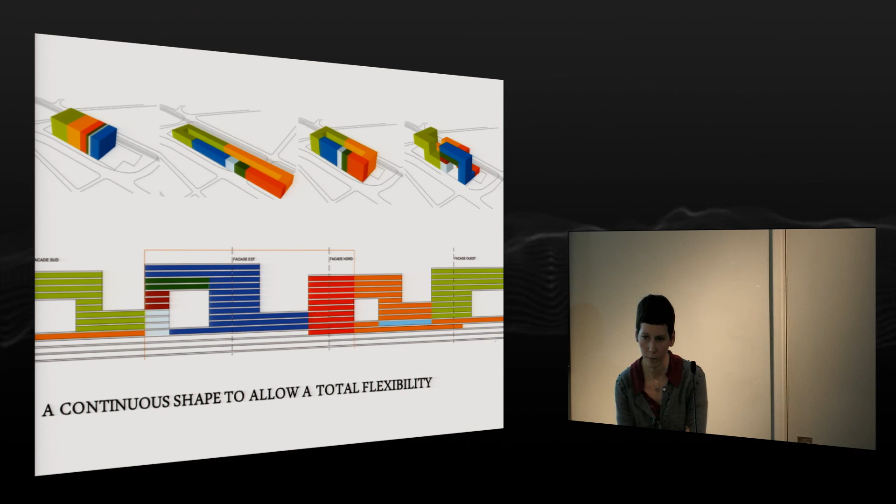Thank you. The first question about Citroën, it was of course very difficult, but if you look at the Champs-Élysées, the architecture is not so historical. I mean, you have a lot of buildings which have been made not during Haussmann, but during the 1930s, 1960s. So the thing which is very strong on the Champs-Élysées is the respect of the alignment. But if you look at the buildings, some of them are very different, and that was my help in the project.

In fact, I had of course to fight a lot, but in a way, I have fought less in this project than for the extended part of the Modern Art Museum in Lille. In France, you have always to fight a lot against the monumental authorities, because they are not open-minded at all. And it was a sort of paradox, but because Citroën is a French brand, a Parisian brand, it has helped me to fight for very contemporary architecture.

Citroën loved the project. They wanted absolutely to keep it, not to decrease the quality of the contemporary architecture, the transparency, the very pure idea to be continuous and so on. And I think I was helped by the fact that Citroën is Citroën. I think it was helpful. But yes, when you are an architect, you spend your life trying to convince.

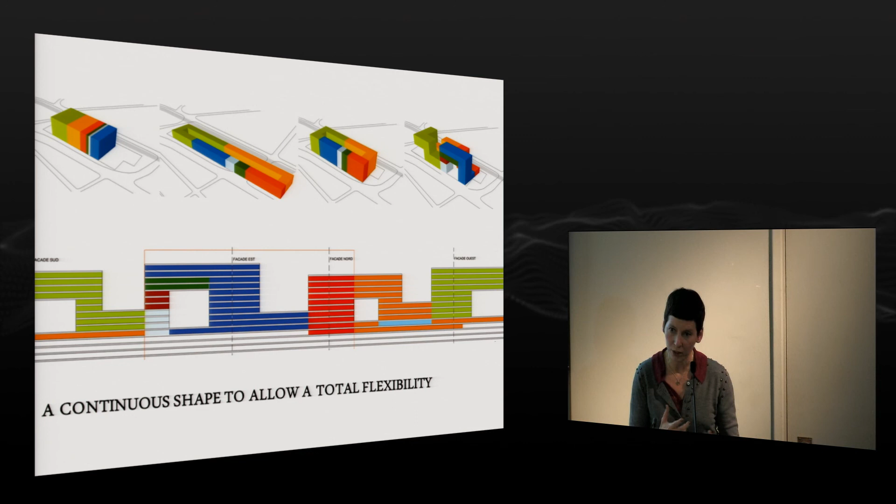And the second question was, yes, about the patterns. I must say that for me, when I work on a project, I always work in advance. In the very beginning of the project, I deeply work on the context, on the site, trying to understand it, on the program, trying always to improve the program. So after I try to create a sort of link between them, a hierarchy or a harmonic link. But I'm always working immediately, even in the beginning, on the materials, on whether the building will be very opaque or transparent, on the texture, on the materials.

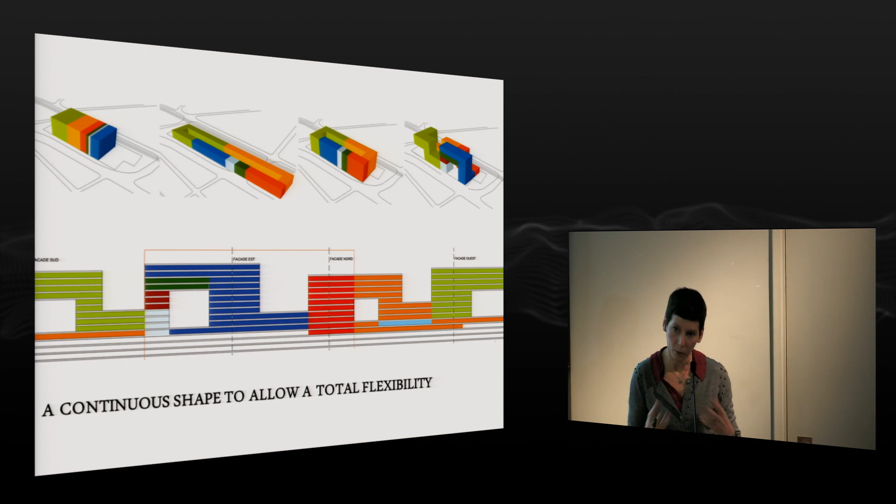I didn't show the project made in the Avenue de Friedland, which is headquarters for Barclays, and we have made a facade which is built with translucent marble. And it's beautiful because the marble is translucent. There are a lot of lines. It's very graphic. I think the material and the texture are very important for me in architecture. And I don't think first about the volume, and in the second step the material, and the third step the color. For example, Saint-Étienne, the yellow helped me in the beginning to accept to do a very dense building with a very narrow interior street.

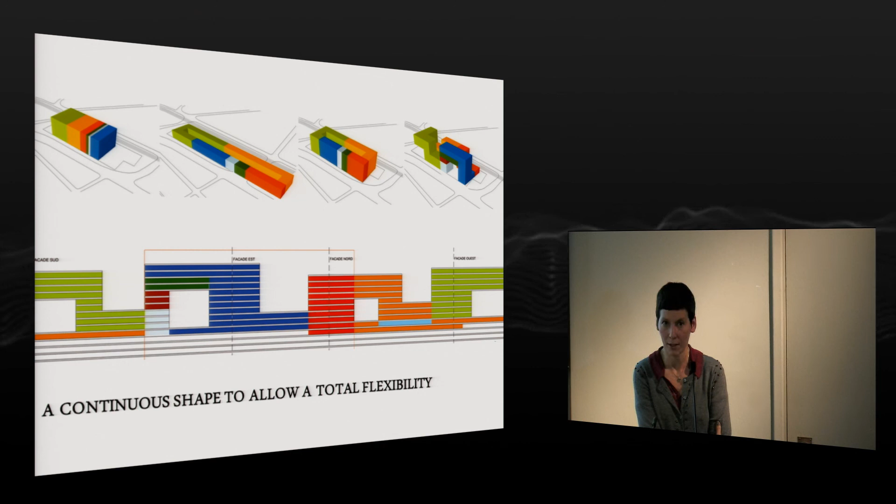So when I begin a project, I always have the goal to work on all the aspects of the architecture in parallel. And we like a lot in the office to experiment with new materials, and I think the pattern, the ornament, sometimes in the project they are not present, but sometimes they are really a part of the birth of the project. For example, Citroën, the facade, it's the logo. And the facade is a sort of pattern of the logo, and I think it's quite the first idea before everything else.

I was curious if I might ask two questions. The first one is about that Citroën building. Having lived in Paris, downtown, I know that it rains usually about twice a day. I know that it's dirty, dusty, filthy. And I was curious as to the people that have to work there, the people that come in to look at the cars, the people that have to work to clean it. I was wondering how the building is holding up, and also if it's leaking at all in the roof, and how do the people keep it clean? Is it a pleasure to be in for the people that must be there all the time and not just come and go, wow, if you know what I'm saying?

My second question would be, you and I were born in the same year, an ocean apart from each other. However, I noticed that you seem to, I don't know how to put this, I'll do my best. Your buildings, you take a lot of thought and consideration into who's going to use it, how they're going to use it, and what has influenced you to think that way? I don't want to use that cliché, out of the box. I know it's not revolutionary. Sometimes different people do these things. I've seen Raymond Moriyama do this in the 70s. Other people do different things along the way. So I was just very curious as to what influenced you growing up to think and produce the buildings that you do.

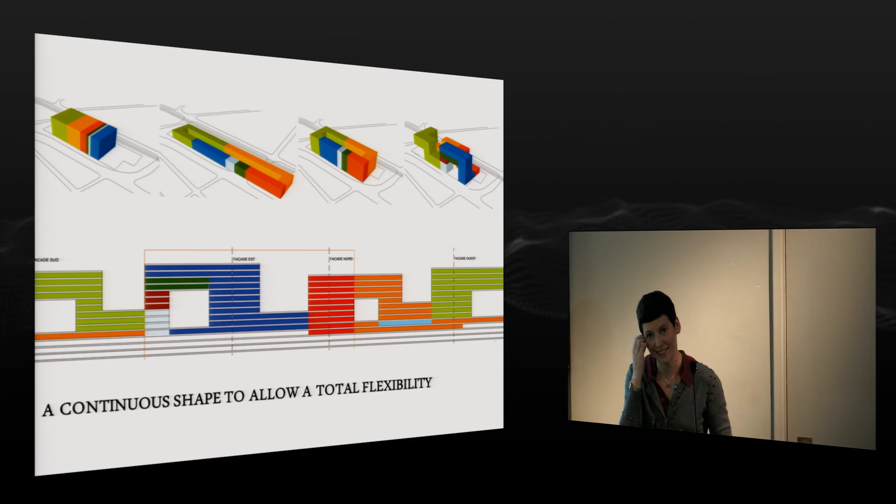And the difficulty is the fact that we have a lot of visitors, 3 or 4 times more than expected. Because it is the Champs-Élysées, because the public is not coming only for the cars, but also for the architecture. And of course, the difficulty is to clean all that, to change the cars, and so on. And I don't know what to say facing that.

I admit the fact that it's expensive to clean the building, but I think Citroën has to pay for that because it's the Champs-Élysées. It's the most expensive square meters in France, in Europe perhaps, and you have to build something which is perfect, but after they have to put a lot of money to clean it. It's normal. You are on the Champs-Élysées, and one more time, it's the main building of Citroën in the world.

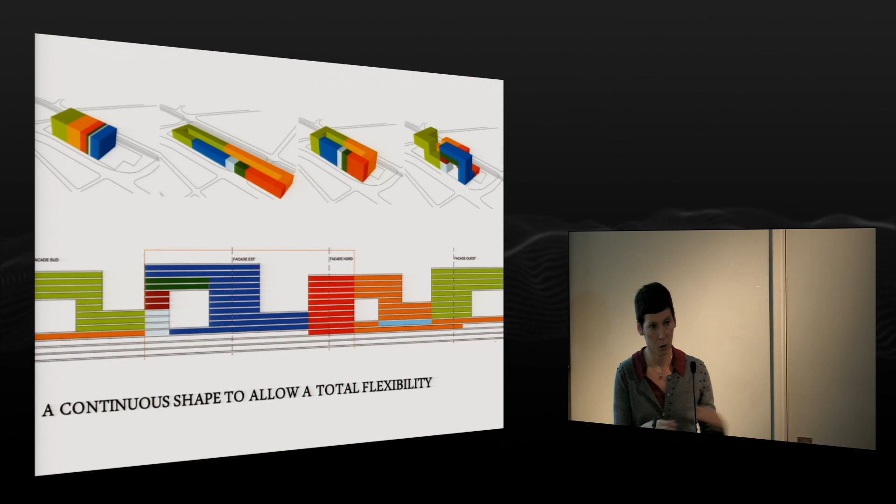Just a question about the cars. In fact, the atrium is a huge void. It has a function because you have a sort of lift which is coming from the basement, and the lift is taking the cars coming from the pavement, from the Champs-Élysées. The lift is taking the cars onto the shelves, and they do that 4 times a year.

In a way, it's very expensive to clean the building and to repair it and so on, but they always use it totally. It means that the building was made to change the scenographies a couple of times in the year, and they really do that. Still, 6 years after the opening, they always have a lot of pleasure to change the scenography, and they do that 4 times a year. So in a way, it's successful. The only problem, if it's a problem, is the fact that there are 4 times more visitors than expected, and architecture is also confronted with that.

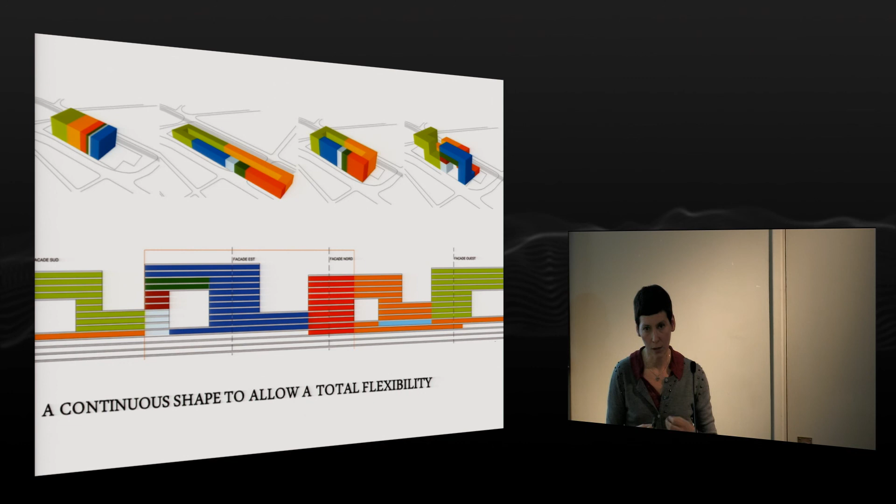The second question was the fact that I'm always looking at the way that the users will live in the architecture, to sum up. But I think it's the objective of architecture. And I think it's important for my clients to understand that I have a personal way to create architecture. So they have to respect the fact that, in a way, architects are a little bit artists. There is something very subjective in architecture. But on my side, I have to respect the fact that I'm not totally an artist. I'm doing something where people will live.

And I think the more you can anticipate the goals and the way for the users to live in your architecture, the more you can be confident that the building will be respected. For example, Citroën, I'm very happy to realize, even with a huge financial crisis at Citroën, that they continue creating a lot of scenography. So it's successful for me because I have made a flexible building and they really play with that.

And I think one of the main qualities of an architect is to anticipate the goals of the users, the way that they will live in your building. And if you do that, it's very simple, because when you have finished a building, you can leave it, and you don't have to check if the client is respecting it, if they are making changes, if you can accept the changes. You can leave the building, and the building will have its own life.

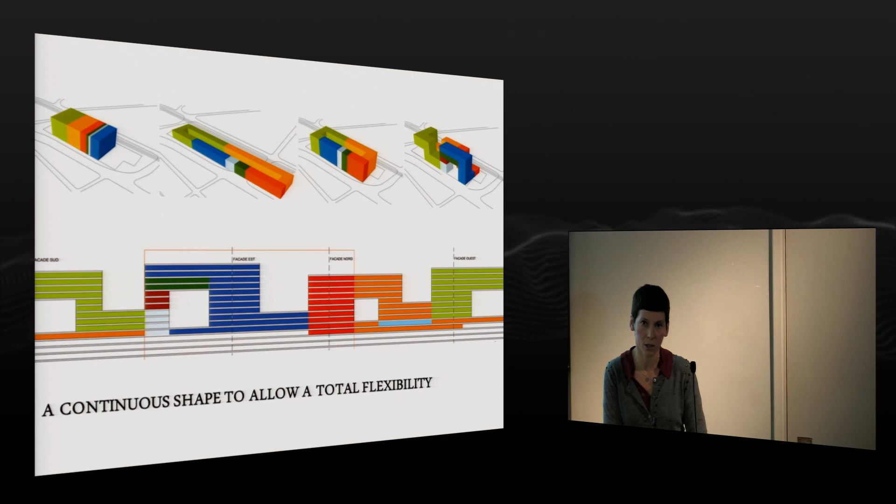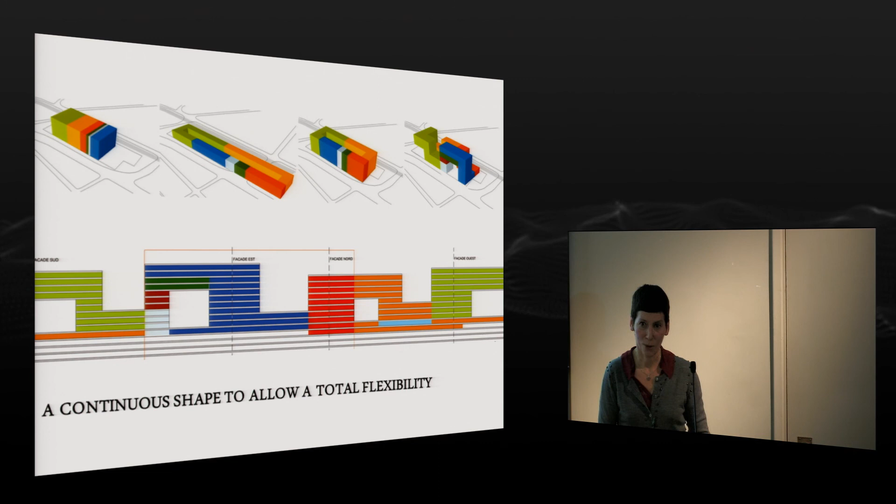So for me, it's very important to respect the users, to analyze the program deeply when I'm doing a project, to try to understand. For example, for the Gaîté Lyrique, it was so difficult to anticipate the way for the digital arts to play and to work in the building, because it's typically a form of art which is really moving, and we don't know what they will need tomorrow. So it's always my huge stress to try to do something which fits the users perfectly, not for 1 or 2 years, but for the maximum of years.